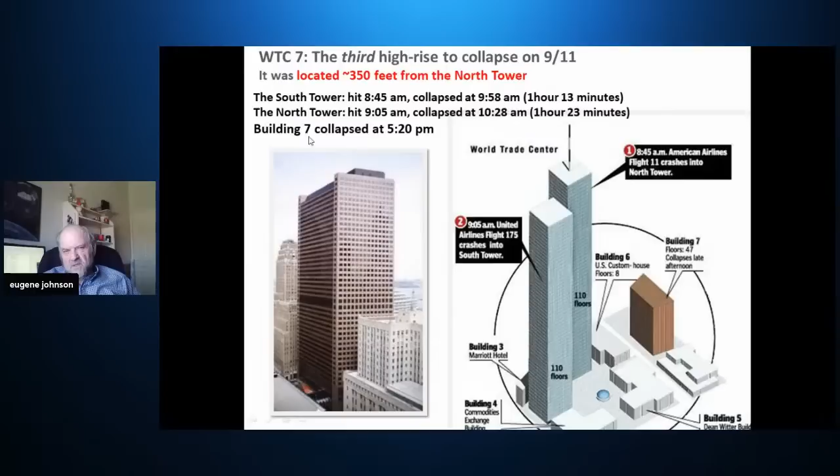Now those towers were over a quarter of a mile tall, 1,300 feet or more. The interesting thing about all three of the buildings is they came straight down. They were all unique in the fact that they collapsed in about the same way. Had those Twin Towers tipped over, you'd have had considerable more collateral damage surrounding the area in Lower Manhattan. Building 7 never collapsed until 5:20 in the afternoon.

Approximately 7 hours after the fall of the towers, Building 7, not hit by a plane, collapsed and turned into this 5-story rubble pile in 7 seconds. It was in free fall for 2.3 seconds. Now that free fall and the 7 seconds, we're going to talk about that after this introduction video.

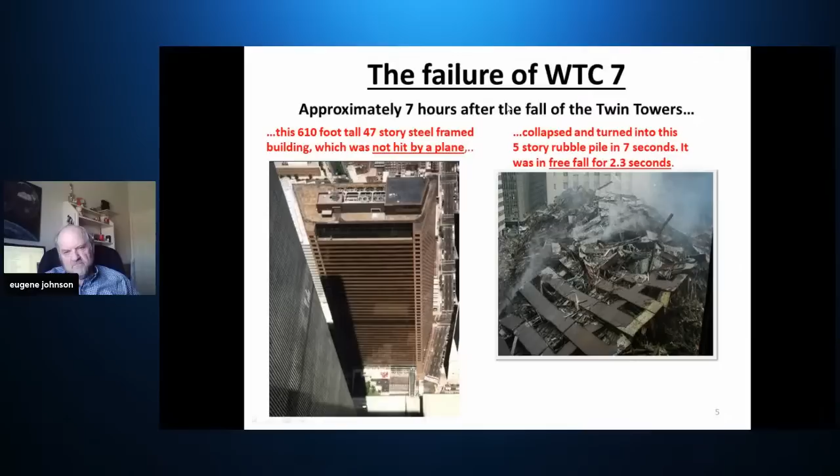For the third time today, it's reminiscent of those pictures we've all seen too much on television before, when the building was deliberately destroyed by well-placed dynamite to knock it down. Did they actually use the word brought down, and who was it that was telling you this? The fire department, and they did use the word. We're gonna have to bring it down.

We heard this sound that sounded like a clap of thunder. It looked like there was a shockwave ripping through the building, and the windows all busted out. About a second later, the bottom floor caved out. We followed after that, and saw the building crash away to the ground. And it turned in time to see what looked like a skyscraper implosion. Looked like it had been done by a demolition crew. The whole thing just collapsed down on itself. It just pancaked.

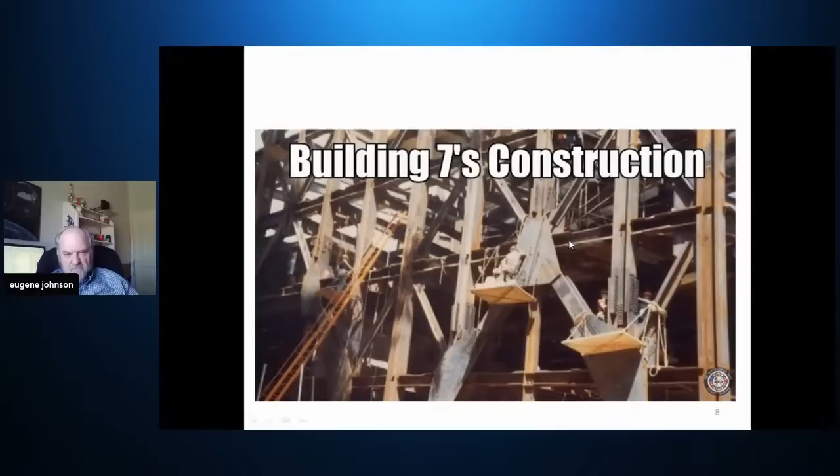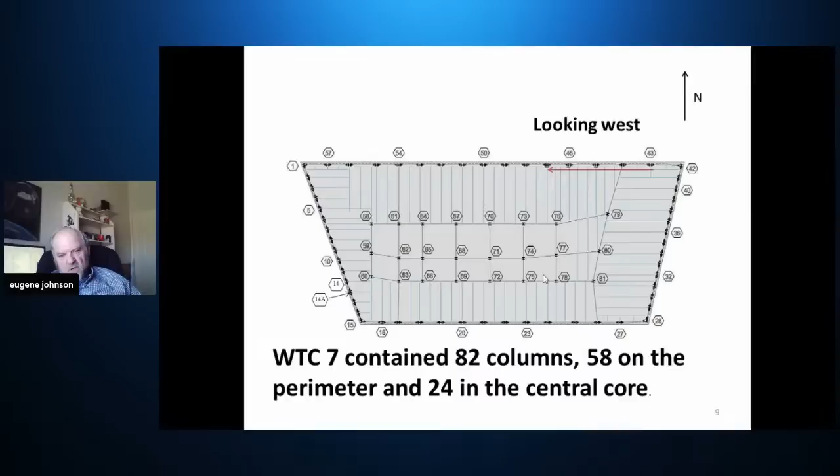There's a worker right here to give you an idea of the scale. The building, like I say, was a trapezoid. It has an outer series of columns and an inner series of columns. You actually have a box, an inner box, inside of an outer box. And this shows you the huge amount of area available for office space per floor. It was over an acre of office space per floor. But there are 58 columns on the perimeter and 24 in the center, and we're going to talk about those columns in a little bit.

Here's a picture showing them laying floor. It goes up floor by floor, and you see the outer columns and the inner columns. And once again, here's one of the workers, to give you an idea of the scale.

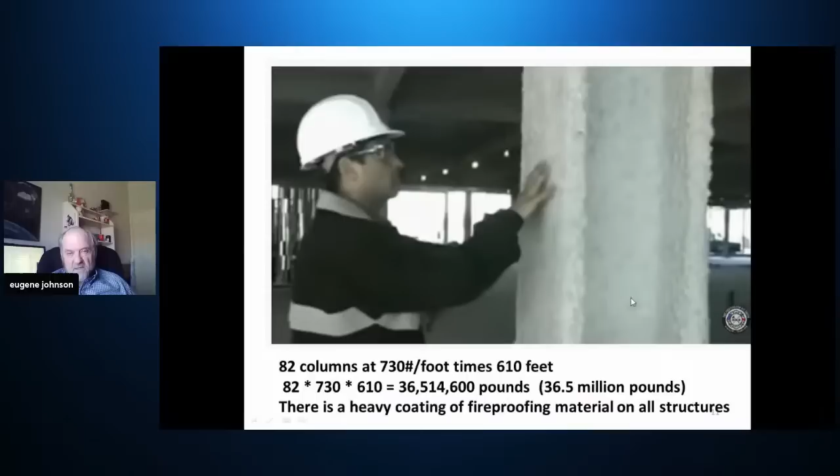We're back to columns now. There's 82 columns, and what you're looking at here is the fireproofing that's sprayed over the top of the columns—all of the structural steel inside the building had been sprayed with this fireproofing. These columns weigh 730 pounds a foot, and the building's 610 feet tall, and there's 82 of them. So if you just take the number of columns times 730 pounds a foot times 610 feet, you get 36.5 million pounds of just columns. And that all has to get taken away so it falls in 7 seconds.

In addition to the standard column, you have some columns that are reinforced with 2-inch plate, welded to the side of the flanges of the column, 26 inches wide, so that it overlaps the 22-inch I-beam column, and that's on each side. So when you add these plates to this column, the weight per foot is over 1,000 pounds. So you cut a section of 1 foot off of this column, you put it in your half-ton pickup, and you've overloaded that pickup with just 1 foot of this column. I'm just stressing the massiveness of the building to show how unbelievable it is that it collapsed in 7 seconds.

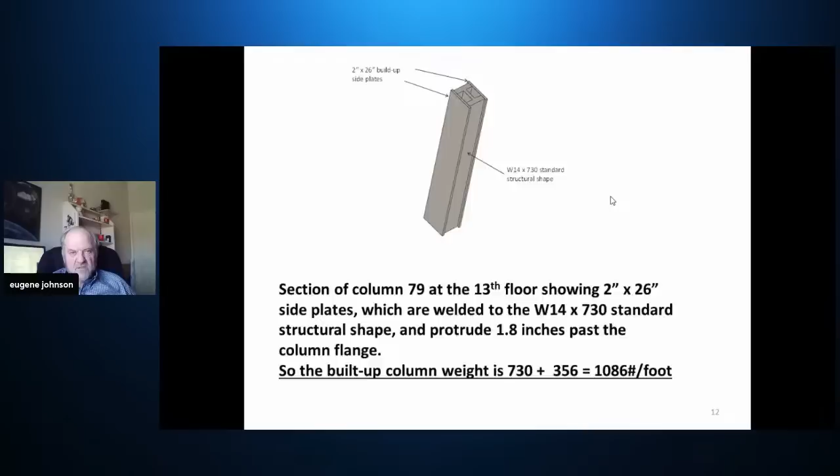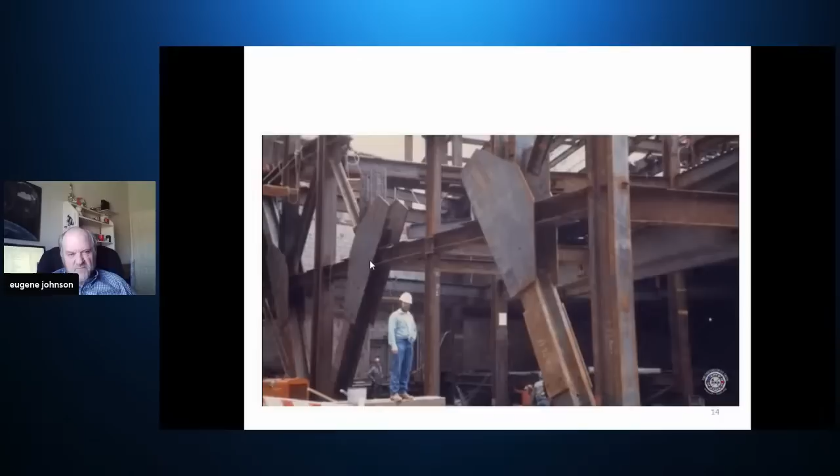On the side of the building, you can see the different columns. These are the standard columns, and here's a box column and another box column. The fabricated reinforced columns were used in areas of high load. So they decided they needed a little bit of extra safety factor in some areas, so they reinforced those columns. Once again, just the massiveness of the structure—this is the size of a football field, 610 feet tall.

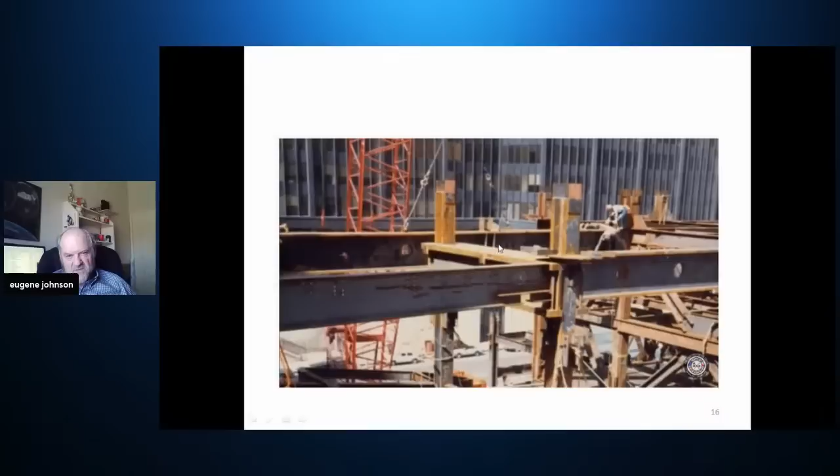I get a little better picture of this guy right here. Just look how massive that piece of steel is. There it is again. Just enormous.

Here's a picture of the floor looking from the east to the west, from the northeast corner. We're going to get back to the northeast corner because that's when we start talking about what NIST says about how the failure occurred. We're going to be focusing on the northeast corner, but this way you can see the floor space. It's 47,000 square feet of rentable floor space, more than 1 acre.

The concrete on this is 4 inches of poured concrete. Looking at the ceiling, you can see the concrete is poured on this steel pan, 4 inches of it. There's 47 floors, and at 4 inches per floor, you've got over 15 feet of concrete. Just think of a football field with a 15-foot fence around it, and fill that up to the top of the fence, and you have the amount of concrete that's in this building.

When we get a little farther into the conversation about what NIST says happened, we're going to be looking at these floor beams connected to this girder.

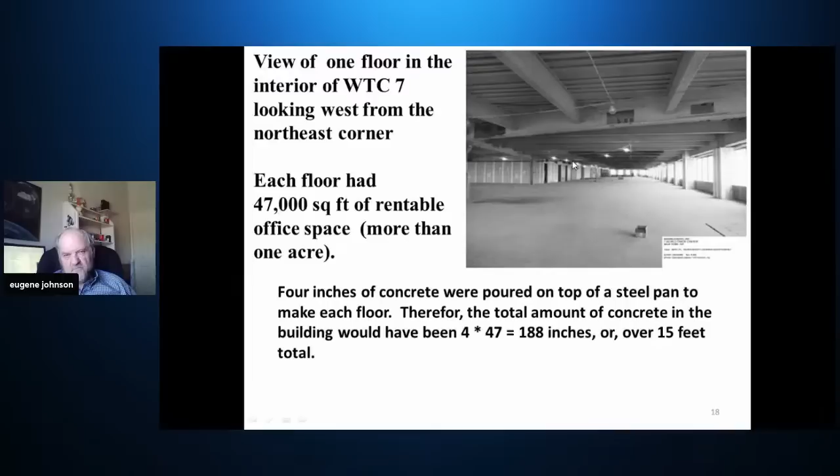Now, early in 2009, NIST posted a video saying why the building World Trade Center 7 failed. It had over 2.3 million views. I'm going to play this video, then we're going to go through it and talk about it.

Gene, we're not hearing the audio. Maybe turn up the speaker and start it over again. Still not hearing the audio—perhaps the speaker feeding into your microphone needs adjusting. I just have the sound off of the video, not sure how to make that louder. Do you have a speaker that feeds audio from your computer? No, it's just the computer's own audio. Is there a way to turn up the volume? No, I've got it all up. Let me see if I can. There, all right. While he's doing that, that's live television for you, folks—we're going to have some glitches, and we are. I heard that, I've got these earbuds in and it goes right through my brain. Let's try it again, I've got it all the way to the top now.

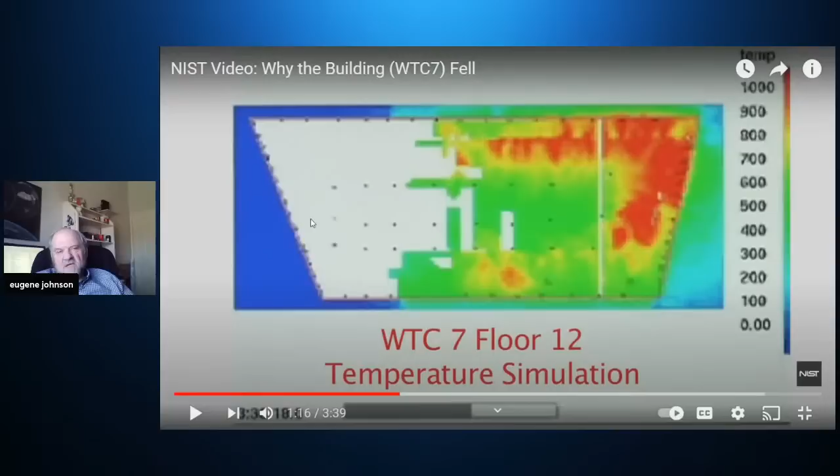No, I'm still not hearing any audio off of that. Unfortunately it seems we're having problems playing the video, or at least hearing it. It is a 3-minute video. If we can't get the audio to come up, perhaps you can give our audience a general gist of what they are talking about and what you'll be addressing later in the presentation. Yeah, let's do that. I don't really need the video because I take sections out of it and I've narrated it, so let's just avoid it and not go with the video. Sorry about that.

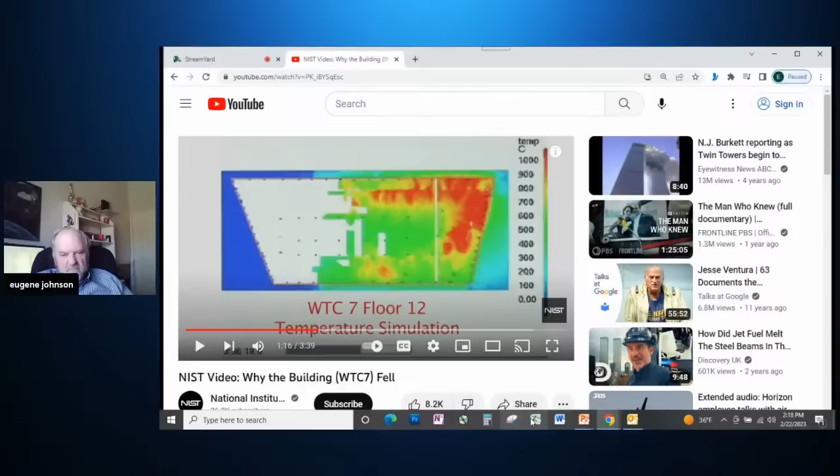I want to introduce you to Dr. Shyam Sunder because he's the key person in this video. He's the NIST World Trade Center lead investigator for the buildings. Here's what he says in the video.

He says the NIST team found no evidence that explosives were involved in the collapse. Our analysis showed that even the smallest explosive charge capable of bringing down the critical column in the building, had it occurred, would have produced sound levels of 120 to 130 decibels about a half a mile away. That would have been an incredibly loud sound, and that sound was not picked up by any of the videos or witnesses that we have talked to.

So, what did he just say? He said NIST, the National Institute of Standards and Technology, concluded there weren't explosives because nobody heard sound levels of 120 decibels.

Is Dr. Sunder ignoring the scientific method of research? That method doesn't draw conclusions based on hearsay. The scientific method is a process of objectively establishing facts through testing and experimentation. The basic process involves making an observation, forming a hypothesis, making a prediction, conducting an experiment, and finally analyzing the results. It involves more than asking people if they heard sound levels of 120 decibels.

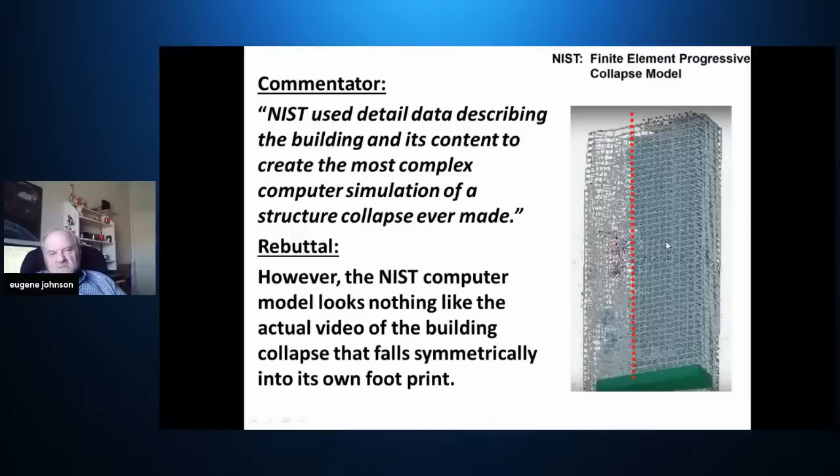And this is the NIST finite element progressive collapse model. The odd thing about it is that their model doesn't look anything like the video of the building collapsing. Here you can see a comparison of the two side by side. The NIST model stops the collapse right about there, and their model doesn't collapse to the bottom like the actual video does.

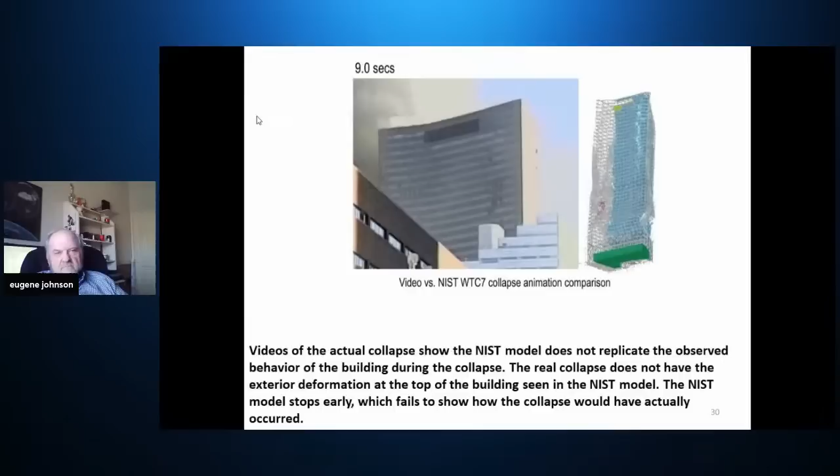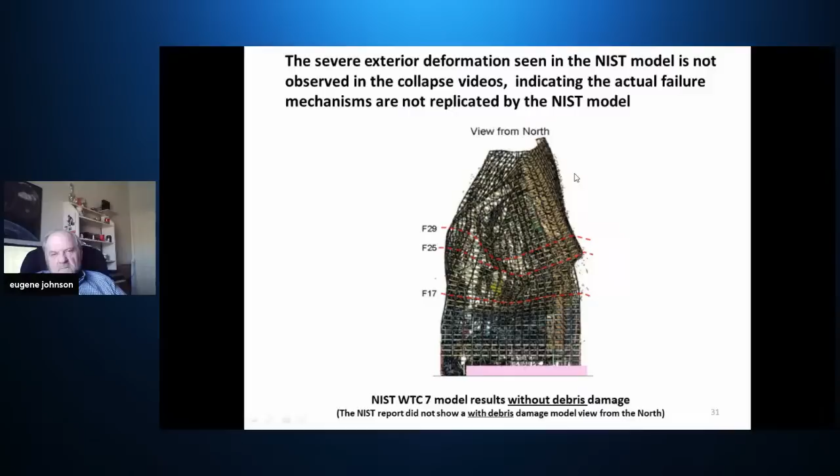This is if you're standing north, looking at the north side of Building 7. This is what the NIST model looks like - completely twisted out of shape, where you don't see that on the actual video. This is the view from the north.

Okay, here we get another very controversial quote from Dr. Sunder. He said, 'World Trade Center 7 collapsed because of fires. We really have a new kind of progressive collapse that we have discovered, which is a fire-induced progressive collapse. In fact, we have shown for the first time that fire can induce a progressive collapse.'

Then, in addition to what he just said, one of the commentators in the video said, 'No tall building had ever collapsed primarily due to fire. But that's exactly what investigators believe happened to the 47-story Building 7, according to a 3-year comprehensive building and fire safety investigation just completed by NIST.'

So he's saying that it's a progressive collapse, which would mean that one event happened which created something like a series of dominoes, ultimately causing in this case a collapse of the building. But how could that happen in 7 seconds? You've got a building the size of a football field.

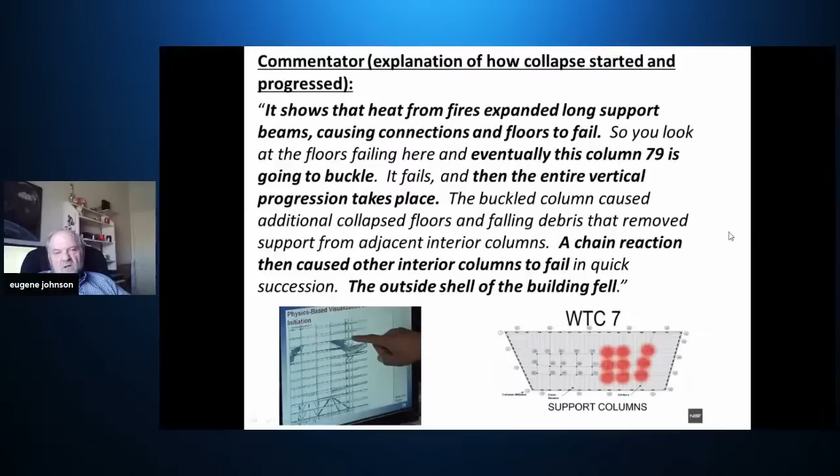Eventually, column 79 is going to buckle, and then the entire vertical progression takes place. A chain reaction then caused other interior columns to fail. The outside shell of the building fell, and you had total collapse of the building. Now, that was supposed to happen according to the video we saw of the building collapsing. That all had to happen in 7 seconds, which was just impossible.

NIST claims the initiation was heat from fires expanding long support beams, causing connections and floors to fail. These are the floor beams, on the 12th floor. There's a huge fire on the 12th floor heating these floor beams to 600 degrees. This is the girder these floor beams are supposed to push off column 79, and the girder heats up to 500 degrees C. The column heats up to 300 degrees C. When these floor beams get heated to 600 degrees, they grow horizontally because of thermal expansion associated with steel. When steel heats up, it becomes larger, and in this case, longer.

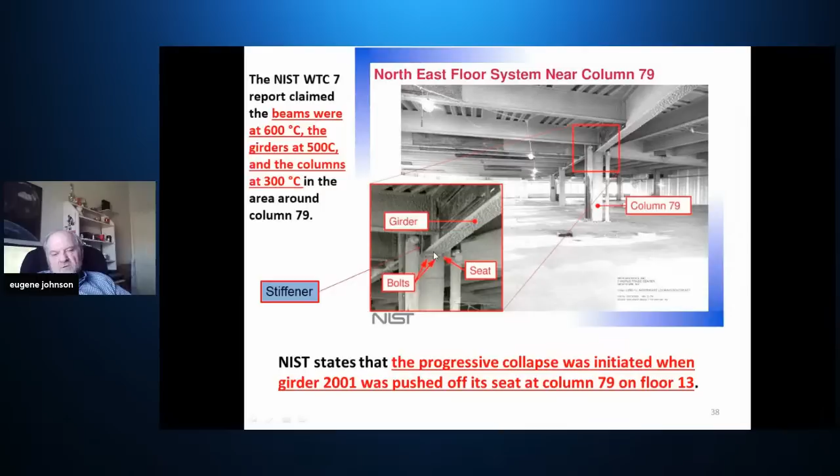What NIST says is happening: this is the northeast corner, column 79, and these 5 floor beams heat up to 600 degrees. They push against this girder and break it loose from its column. When that happens, the floor falls down. It breaks the floor below it loose, and that floor falls down. After several of these cascading falling floors, column 79 is unsupported laterally, and it buckles. When column 79 buckles, there's a sequence of events where the rest of the columns fail, the other 81 columns, and the building falls down.

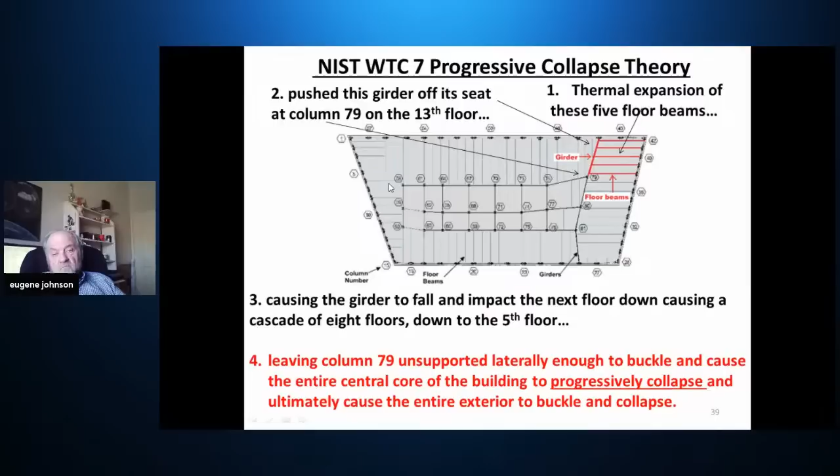So that's the NIST progressive collapse theory. Could that have happened? You have to answer 2 questions. How far do you need to push the girder before it falls off its seat? Because that has to happen if NIST's argument is true. And the next question is, how far would the floor beams expand horizontally at 600 degrees C?

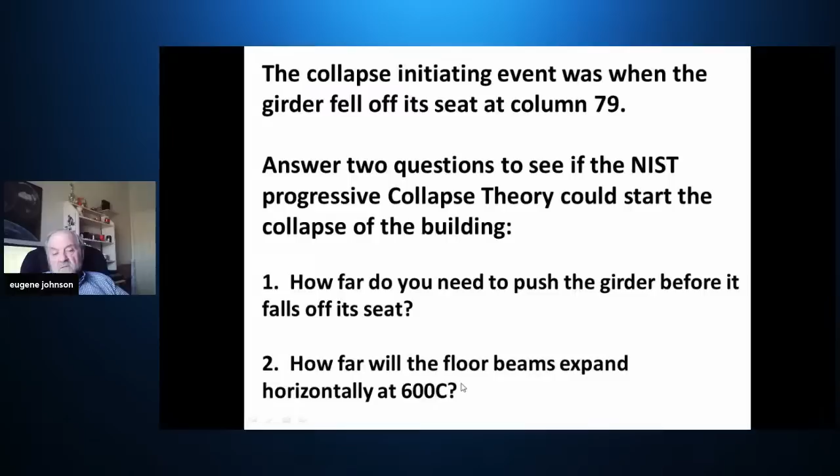From the NIST report: NIST says a girder was considered to have lost vertical support when its web was no longer supported by the bearing seat. The bearing seat at column 79 was 11 inches wide. Thus, when the girder end at column 79 had been pushed laterally at least 5.5 inches, it was no longer supported by the bearing seat.

This is the girder. It's an I-beam, with the flange on top and the web in the middle, sitting on this seat. These blue arrows are the floor beams being thermally expanded, pushing against the web, pushing against the girder, and breaking these 4 bolts, 2 at the top, 2 at the bottom, overcoming the static friction so that the web of the girder reaches the edge of the seat. Once it does that, the girder is going to fall off the seat.

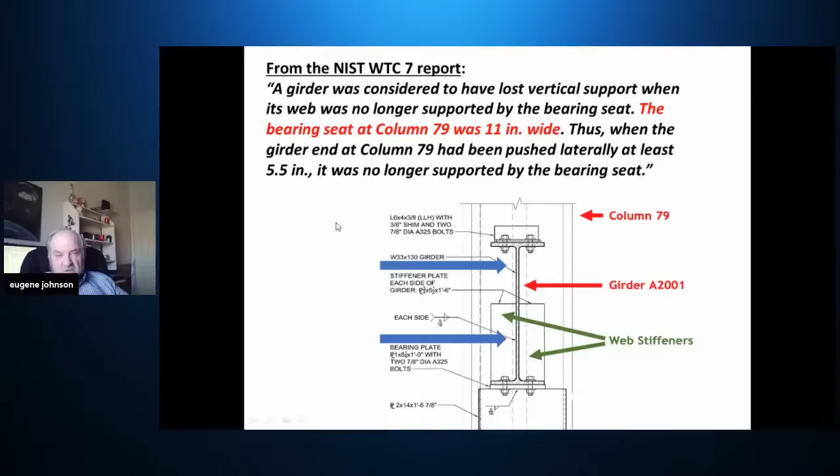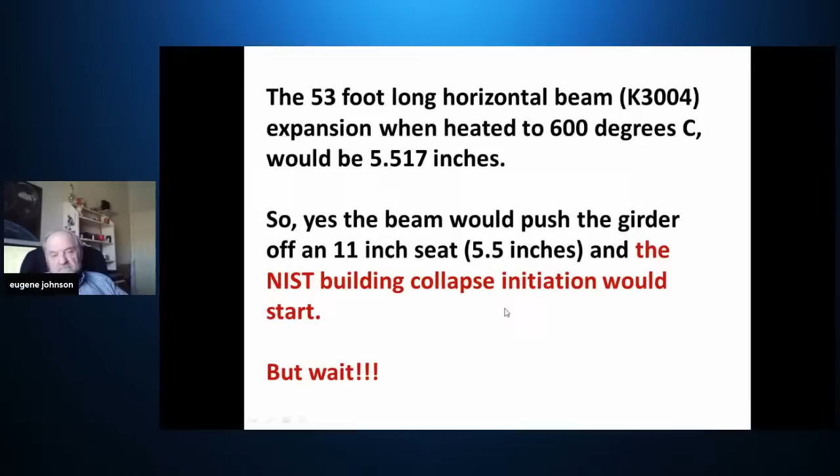The A&E engineers discovered that the construction drawing shows the girder bearing seat was actually 12 inches wide, which NIST later admitted to and issued an erratum. So now that means the girder has to be pushed 6 inches. And we said that the thermal expansion of the beam is only 5.517 inches. So the thermal expansion now is not enough to push that girder off its seat. So the building collapse would not be initiated. That by itself says that the NIST theory of progressive collapse could not have happened.

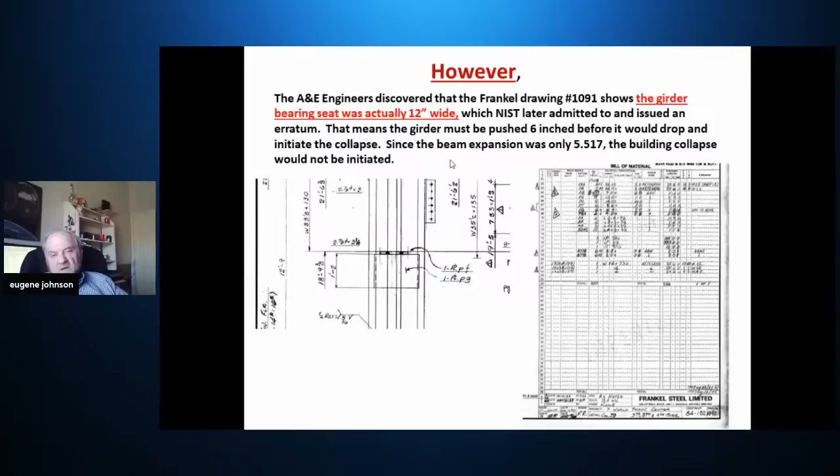But it doesn't stop there. There's more information to look at. Because in those 53-foot long floor beams, when you heat them up, they're supported on each end, so that's a span of 53 feet without support. When you heat that up to 600 degrees, there's going to be a certain amount of sag.

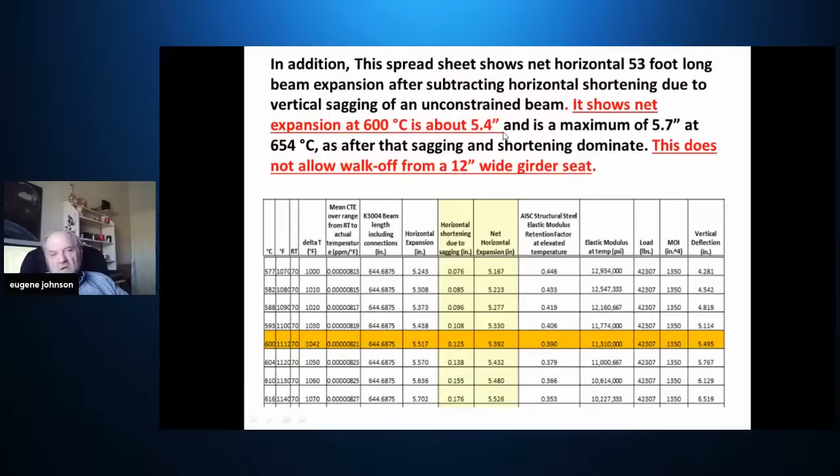And NIST does not take that into account. It's not very much, about 1/8 of an inch, but it shortens the horizontal length.

Another thing NIST ignored were web stiffeners that add strength to the girder web. This is from the Frankel steel construction drawing. It shows side plates welded to the end of the girder. They're 5 inches wide, 18 inches long, 3/4 of an inch thick, welded one to each side of the web and to the flange.

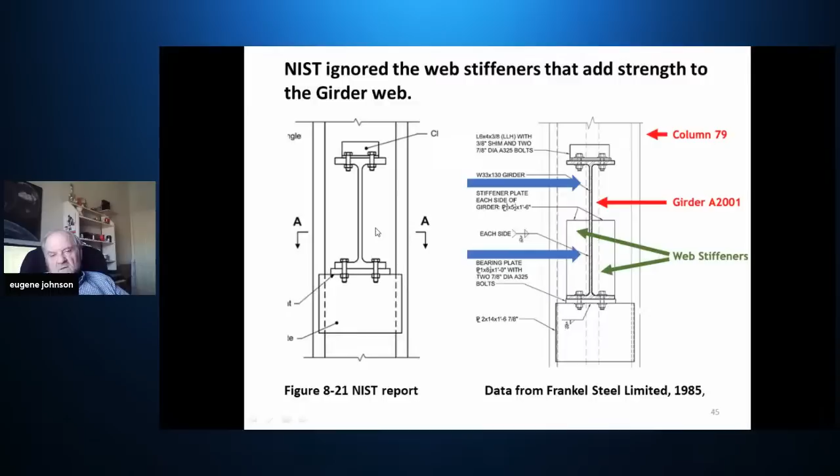If you go to the NIST report and look at their drawing, those stiffeners are not included. We know they're there because here's a picture of them.

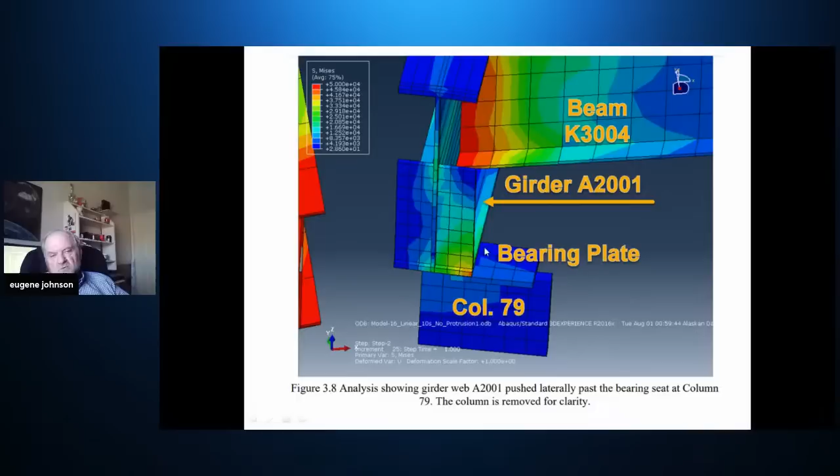Now, when you put the stiffeners on the end of the girder, you can see this is from the University of Alaska report. They looked at this in detail with their computer modeling, and they show that you can push the girder past the edge of the seat without it collapsing.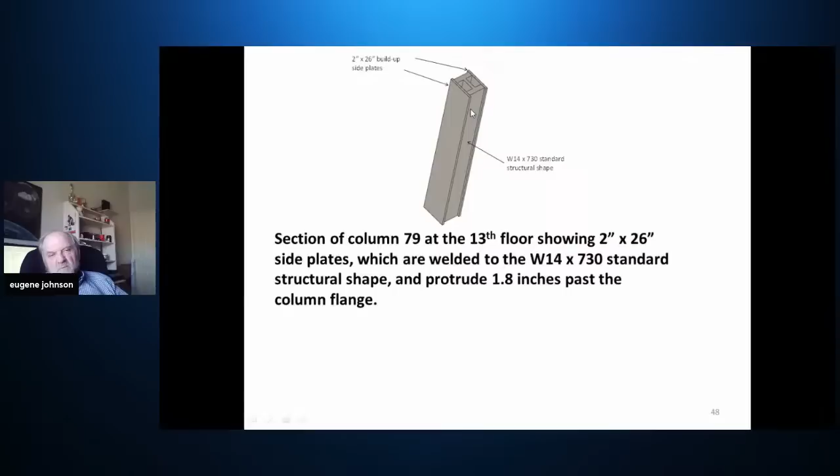Another thing was that I talked to you earlier about column 79 having a fabricated column where a 2-inch thick, 26-inch wide plate is welded to the flanges of the column. It turns out that column 79, the one NIST chose to demonstrate their collapse theory, was one that had the fabricated column. The important thing is that the side plate extends beyond the edge of the flange.

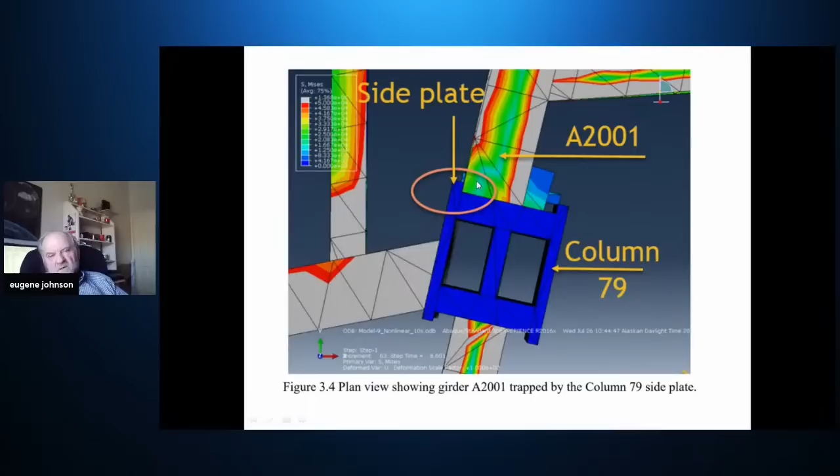So when the floor beams heated up to 600 degrees, and the girder heated up to 500 degrees, it had thermal expansion and elongation. It pushed into the side of column 79, so now it's trapped behind the side plate. So when these floor beams push against the girder, it can't push it off the column because it's trapped behind that side plate.

Finally, NIST considered the outside wall of the floor beams to be rigid. What they're showing is that the expansion of these floor beams against the girder is only in one direction, as you can see by the arrow here. However, according to Isaac Newton, you get an opposite reaction to every action.

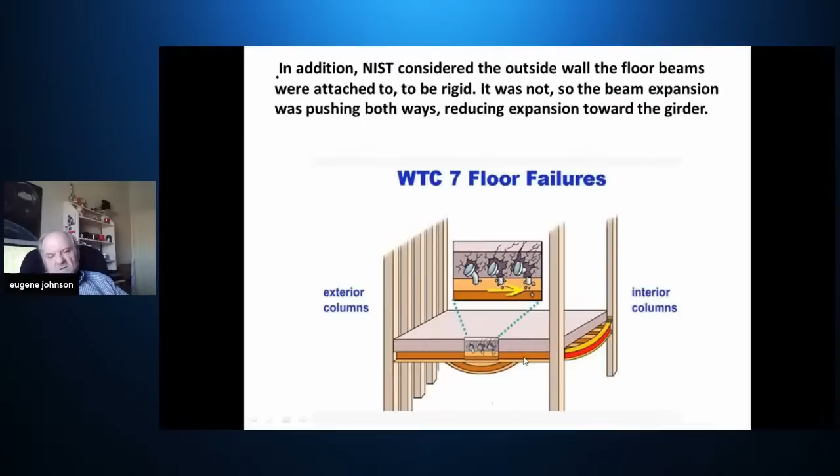So there's a certain amount of force against this outside wall. You would expect to see some deformation, which would reduce the overall length of the floor beams against the girder.

So in order for the NIST theory to work, NIST made some assumptions. They assumed the fireproofed floor beams were heated to 600 degrees, which is really a stretch, because the floor beams were sprayed with fireproofing, and getting those 53-foot long floor beams heated to 600 degrees would take a considerable fire that may not have been available.

They assumed the seat the girder rested on was 11 inches, and then they agreed later it was 12 inches, but they didn't change their theory of failure.

There was no sag assumed in the 53-foot long beams. They assumed the outside wall was fixed, that there were no girder web stiffeners, and that the thermally elongated girder did not become trapped behind the column side plates.

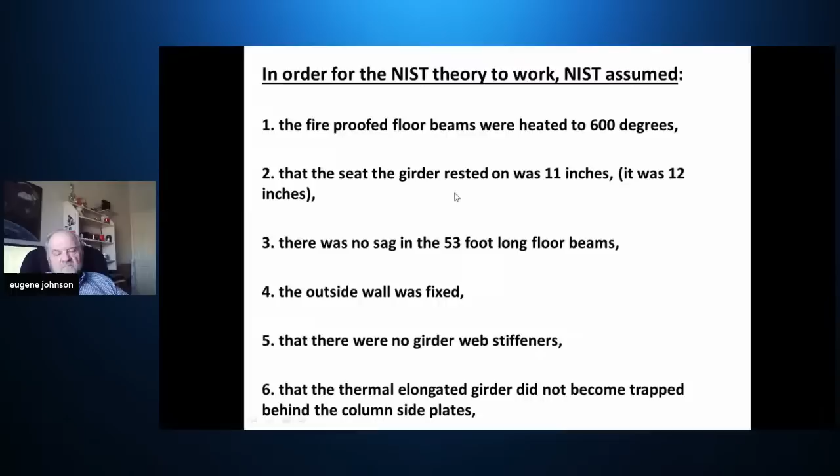But the bottom line is that all of these things question whether or not the NIST theory of the girder falling off column 79 could have ever happened to initiate the progressive failure.

I mentioned earlier there was a research study done by the University of Alaska at Fairbanks regarding modeling the collapse of World Trade Center 7. It was done by Professor Leroy Hulsey, chairman of the Civil Engineering Department, a forensic structural engineer. He and his team put together an analysis of how the building fell and created a model that duplicated the actual video collapse.

The principal conclusion of their study is that fire did not cause the collapse of Building 7, contrary to conclusions of NIST and private engineering firms that studied the collapse. Their secondary conclusion is that it's not a progressive collapse, but a global collapse.

The simultaneous failure of all core columns over 8 stories, followed 1.1 seconds later by the simultaneous failure of all exterior columns, produces almost exactly the behavior observed in videos of the collapse.

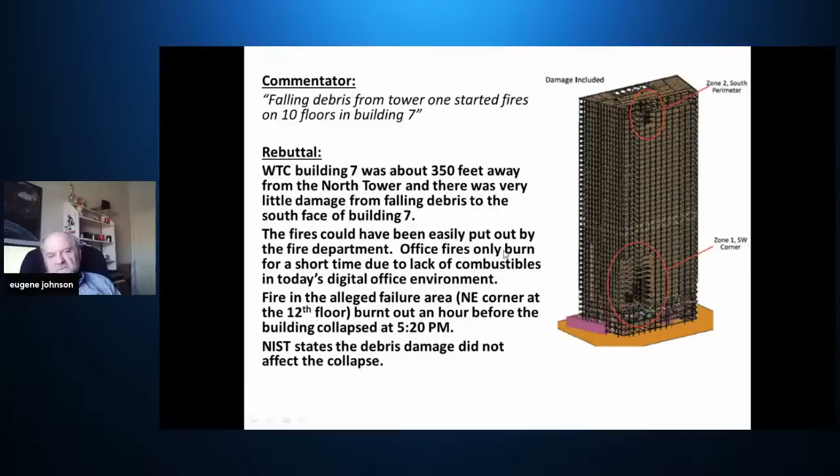One of the things about the fire is that it could have been easily put out by the fire department, but the firemen were told not to go into the fire. If you look at it, it would have been an easy thing to put out.

And I really recommend this. It's a documentary that the firefighters for 9/11 Truth put out. It's well worth the watch. They talk about fire physics and building design, and explain why they continue to go into high-rise fires without fear of sudden and complete building failure. Because after the Twin Towers and Building 7 collapsed because of fires, according to NIST, the firefighters would certainly be concerned.

And then back to the commentator of the video, the team's report also calls for stronger codes, standards, and practices so that other buildings don't suffer the same fate. As a rebuttal, as far as we know, no structural codes have ever been changed as a result of the NIST report.

Now, this doesn't need to have audio, but I came across this video showing what was going on. This is a CBS News cameraman who was walking through Building 7 at 10:10. At that time, the South Tower had already collapsed, but the North Tower hadn't collapsed yet. So let's go through a little bit of this video, and it'll give you a flavor of what the area looked like at that time frame.

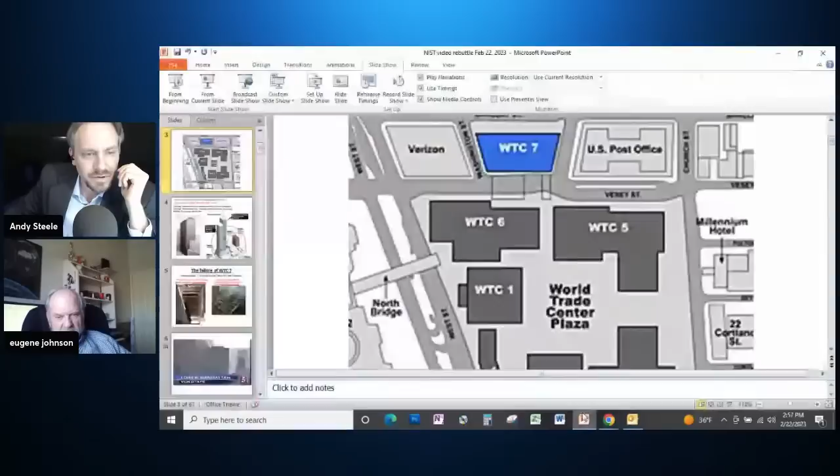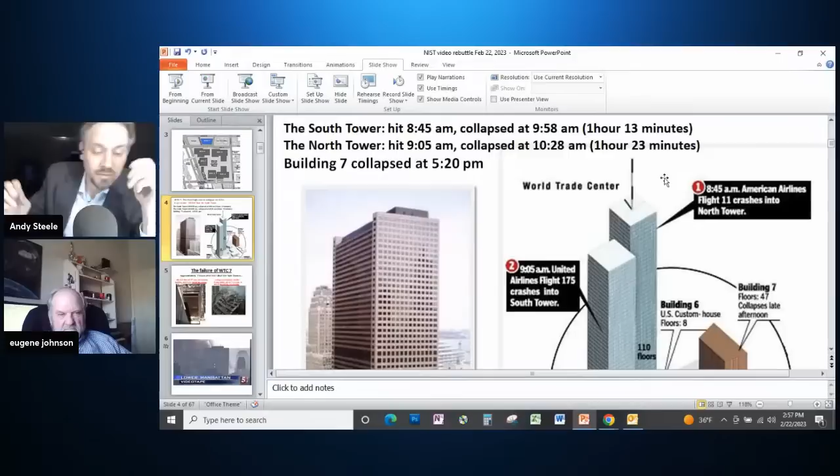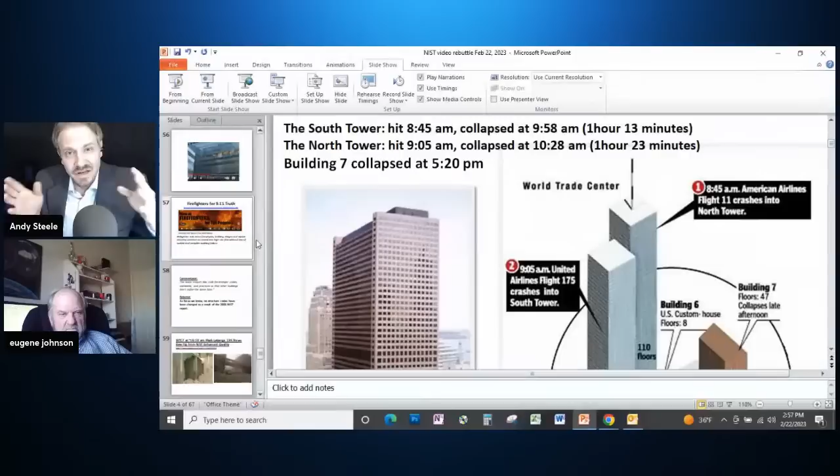So I guess one of the first questions was about the fire sprinkler system in World Trade Center 7, and if there's been any inquiry into that. There's an excellent film called Calling Out Bravo 7, where they make a very convincing argument that the sprinkler systems were actually working that day. They have videos of firefighters operating hoses, putting out fires in the other buildings, and even a video of sprinklers working in the lower floors of World Trade Center 7. Of course, NIST claims they were not working, and says the unfought fires led to the girder being pushed off its seat, starting the series of events that brought World Trade Center 7 down. So anybody interested in the fire sprinkler issue, definitely check it out. It's called Calling Out Bravo 7.

Do you have any comments about that, Gene? Yeah, I just put the link up for that, where you should be able to see it. Okay, Calling Out Bravo 7, there it is. Very good film, definitely worth checking out. It's got a lot of new information. A lot of times when you watch films about the World Trade Center evidence, it kind of rehashes the same stuff and borrows from other films, but this has a lot of original content.

All right, so the first question says, is controlled demolition the only alternative to the NIST model of the collapse, or are there other possibilities for a fire-caused collapse?

Well, I don't think so, because NIST struggled for three years to come up with a reason that building 7 collapsed without using explosives. The only thing they could come up with was that one of the columns had to become laterally unsupported, which happened when the girders fell off of it, and then the collapse sequence started. I'm sure if in three years there was another, better explanation, they would have advertised that one. Yeah, their explanation is so flimsy that if they had something better, they would have ran with it, no doubt.